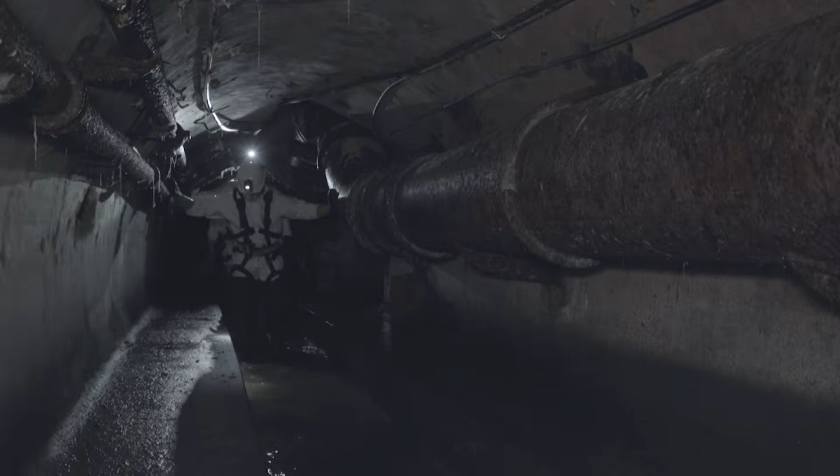This underground labyrinth spreads over 2,600 kilometers, the distance between Paris and Moscow. Hidden and mysterious, and completely unknown to most Parisians.

It's a city beneath the city. Actually, underneath each street in Paris, there's a sewer that's accessible. It feels like entering the bowels of the earth.

Like the city above, the pipes below are always on the move. Every turn of a tap, every flush of a toilet, every minute of every day, Parisians depend on the waste they take away and the fresh water they provide. How does it all work so seamlessly?

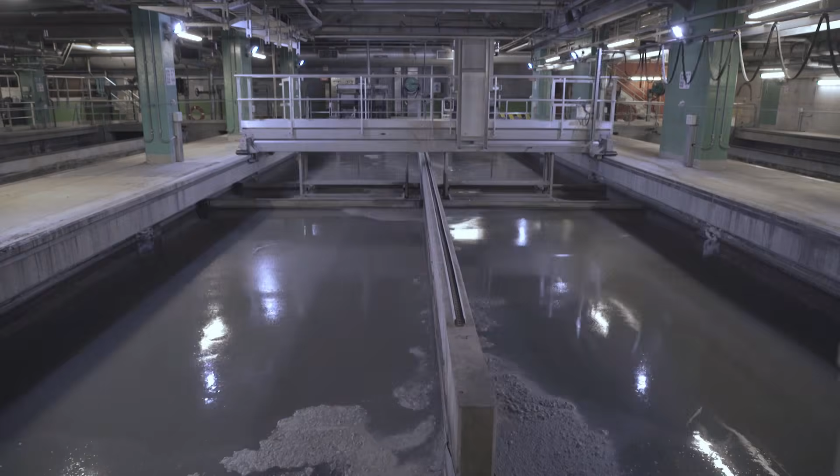Now, thanks to unprecedented access and computer-generated imagery, you're about to discover the secrets of the Paris sewers, where close to 6.5 million cubic meters of wastewater travel daily, equal to 70 Olympic-sized pools per hour.

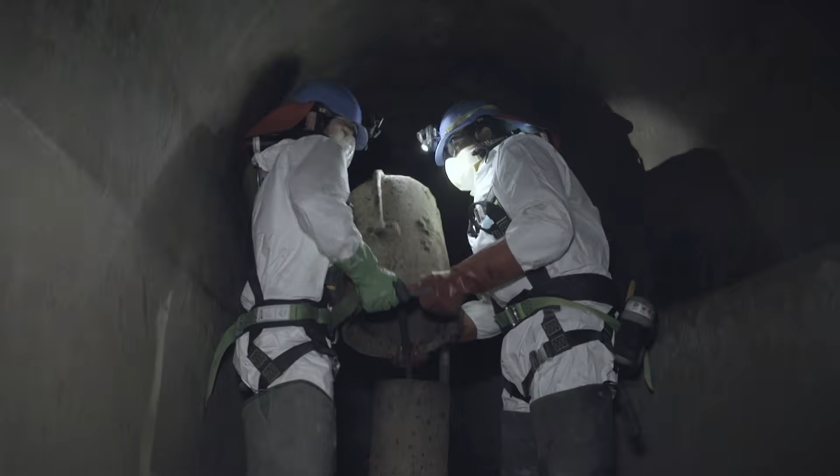This massive infrastructure demands extraordinary equipment. From high-power flushing systems and huge reservoirs to century-old boats designed to clear sand.

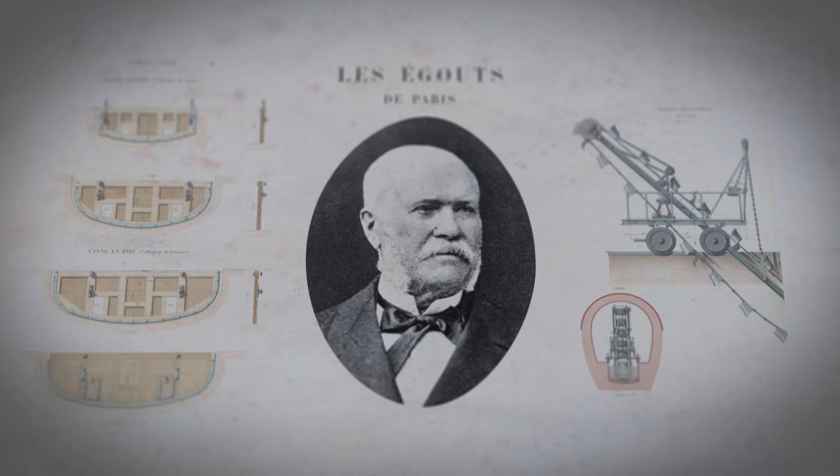The sewers are an undeniable part of the technical and urban legacy of Paris. The know-how and these extremely advanced constructions and machines have withstood the test of time.

Since its creation in the 19th century, the modernistic sewers have transformed to keep pace with the vital city above. Witness the elaborate techniques designed to deal with flooding, heavy rainfall, and provide high-speed decontamination.

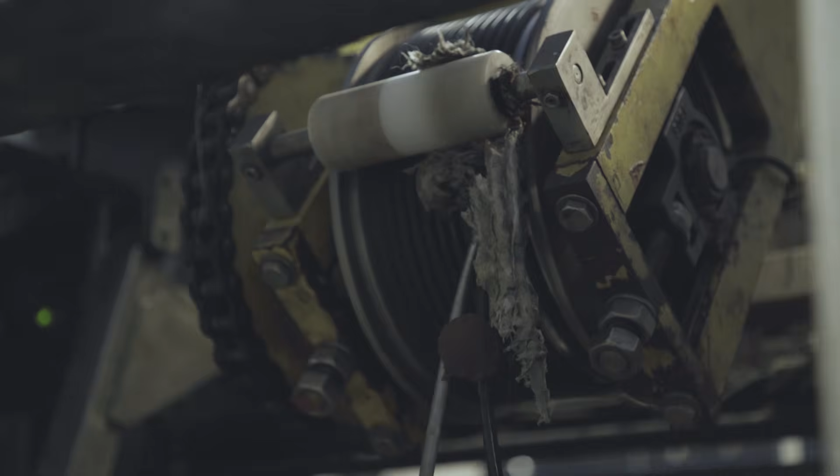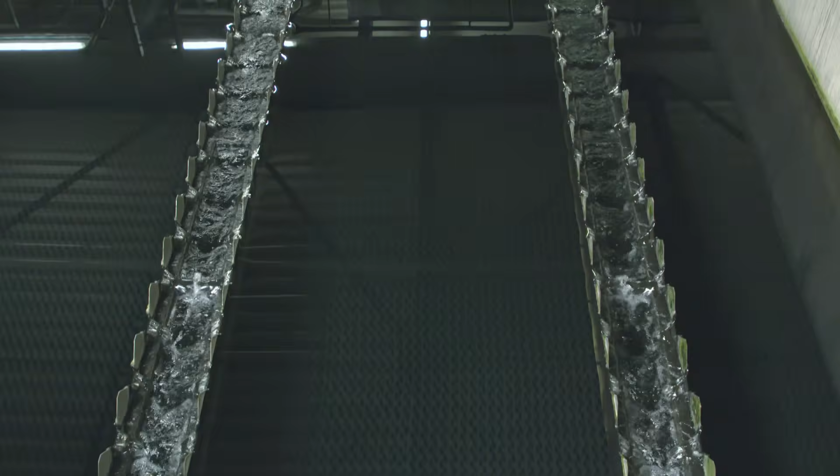Nowadays, thanks to accelerated techniques used inside the plant, we're able to treat wastewater in just a few hours. From the collection of rainwater and wastewater to the distribution of drinking water, your sewer tour will take you on a fascinating behind-the-scenes adventure in history and technology. Deep inside the bowels of Paris, without getting your feet wet.

Every day in Paris, more than 2 million residents flush their toilet, clean their dishes and clothes, and take a shower. All this domestic water ends up in the sewers. This amounts to over 6.5 billion liters of wastewater that must be evacuated each day. Every hour, the equivalent of 70 Olympic-sized pools flows inside this invisible yet gigantic infrastructure.

In fact, the sewers are a network of tunnels mirroring the layout of the streets and boulevards above the ground. In total, 2,600 kilometers of galleries meander underneath the city. If they were put end to end, the sewers would cover the distance between Paris and Moscow.

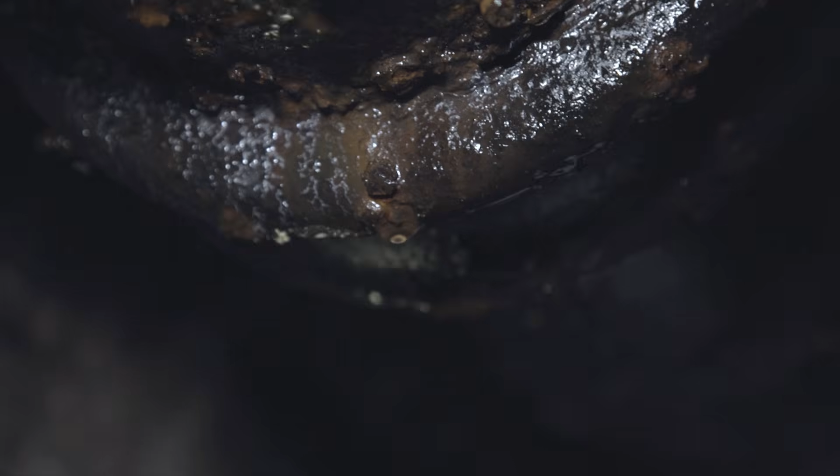This extraordinary infrastructure serves several purposes. On top of collecting wastewater, these tunnels gather rainwater and prevent the flooding of Parisian streets when heavy storms occur. This network also plays a crucial role in providing drinking water to local residents. The underground galleries host a 2,000-kilometer network of pipes distributing drinking water to every Paris household.

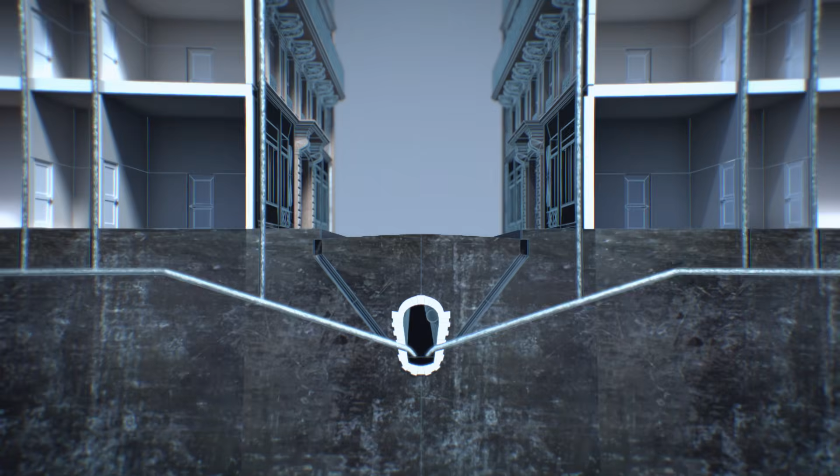Once used, this water returns in the sewer system located only 3 meters underground. Each building has its own evacuation outlet connected to a primary sewer that's about 1.3 meter wide. This first link of the sewer chain then reaches a sub-collector. The latter flows in a main collector between 4 to 6 meters in diameter, located under the big Paris boulevards.

This system can be compared to what you have in nature, such as a source, a small brook flowing into a river until it reaches the sea. It uses the exact same process as the elementary sewer collects wastewater from a single outlet before flowing into a collector and finally reaching the sea, which is represented by the water treatment plant.

The mission of the sewer system is to evacuate the wastewater of over 2 million Parisians, 24 hours a day, 7 days a week. In order to maintain this hidden network, city workers go inside the sewers on a daily basis.

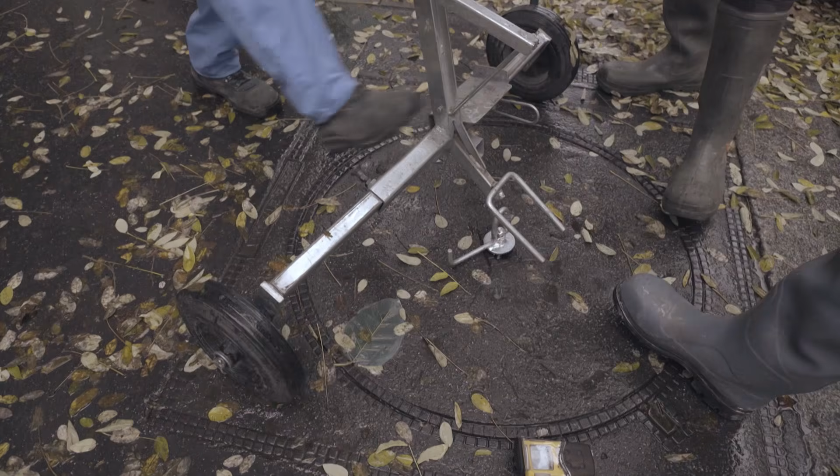Sewer workers access the tunnels through one of the 20,000 manholes scattered across the sidewalks of the capital. Each lid weighs over 80 kilos. Under the pavement, workers find themselves in a confined space ruled by darkness and humidity. This hidden and mysterious part of Paris is completely unknown to most of its residents.

At first glance, the sewer network looks like a maze of alleys and narrow pathways. But in essence, this huge infrastructure is just a mirror of the city streets. Each street, avenue, and boulevard have their counterpart sewer tunnel. This 2,600-kilometer network provides every Paris building with a direct link to this intricate universe.

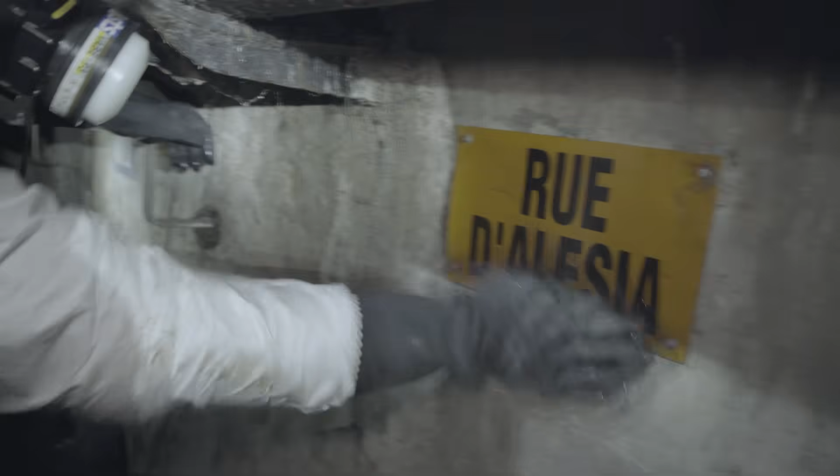Right now, we're under Rue d'Alésia. As you can see, sewer workers install signs to serve as bearings. Every building found above ground has its equivalent inside the sewer system. Here, we're under number 61 and 63. These are the two building outlets. Someone probably flushed their toilet or used water from this section of the building, which is now being collected.

Paris has a total of 100,000 such connections, linking every building to the sewer system. Wastewater from each building is gathered in a single evacuation pipe before being discharged into the sewers.

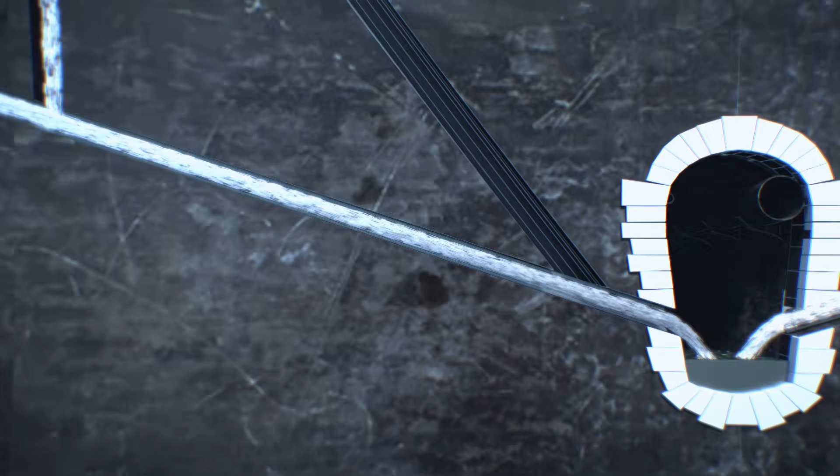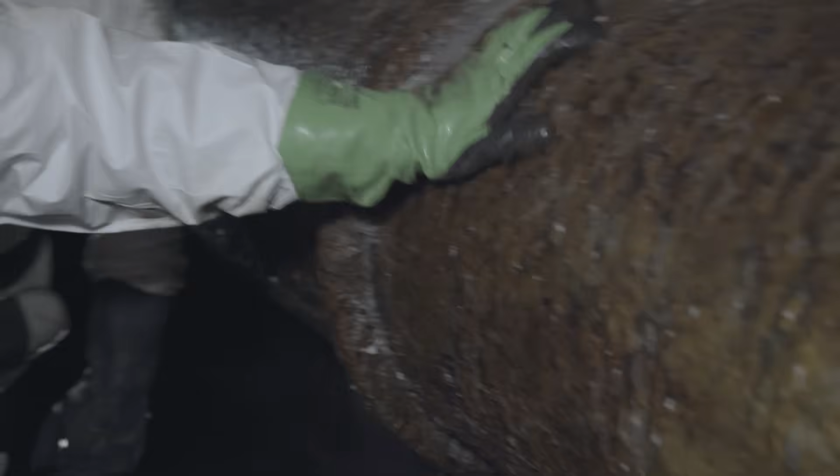In Paris, some 300 sewer workers are responsible for the safe flow of wastewater. Every day, they walk inside the bowels of the capital to maintain this gigantic network. These galleries are part of the historical heritage of Paris, designed over 150 years ago.

In the beginning of the 19th century, wastewater drainage was fairly rudimentary. Whenever heavy rains fell, black water would flood the streets, releasing a foul smell. Paris was at the mercy of the Seine River, so in times of floods, the river would commonly rise through people's cellars and the sewers, causing water to pour onto the streets, carrying garbage, filth, and all the disgusting things traditionally found in urban settings.

In the early 1800s, Paris only had a few dozen kilometers of sewers at its disposal. There were hardly any sewers, and moreover, they were poorly designed and maintained. As a consequence, the city was, according to its residents, unpleasant for both the eyes and the nose.

The poor drainage of wastewater caused several cholera epidemics, killing thousands of Parisians. This dire situation needed to be addressed.

The sewer revolution started with the arrival of Napoleon III and Prefect Haussmann. The city underwent an unprecedented transformation, both on the surface and under it.

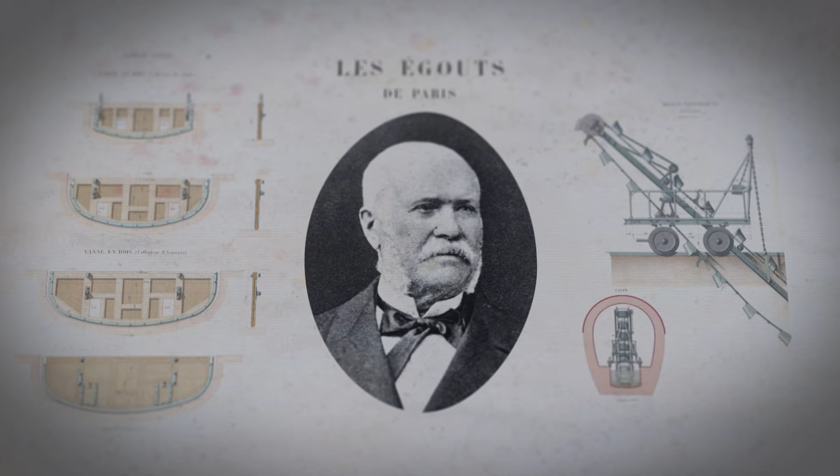To clean Paris, Prefect Haussmann entrusted visionary civil engineer Eugène Belgrand with this ambitious mission. Belgrand's goal was to drain black water through a gigantic underground sewer system.

Belgrand's idea was to develop an underground city planning far more advanced than before. He wanted to dig underground galleries able to collect a large amount of water, and in doing so, to develop a city on two levels. The scale of his project was quite utopic.

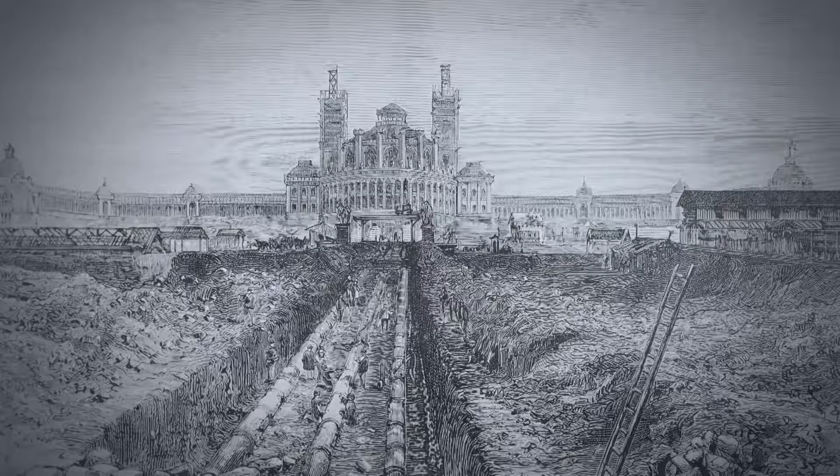To see their mission through, Haussmann and Belgrand undertook colossal work. Every street of Paris was successively ripped open and tunnels were dug. The work stretched over several decades and forever changed the face of the capital.

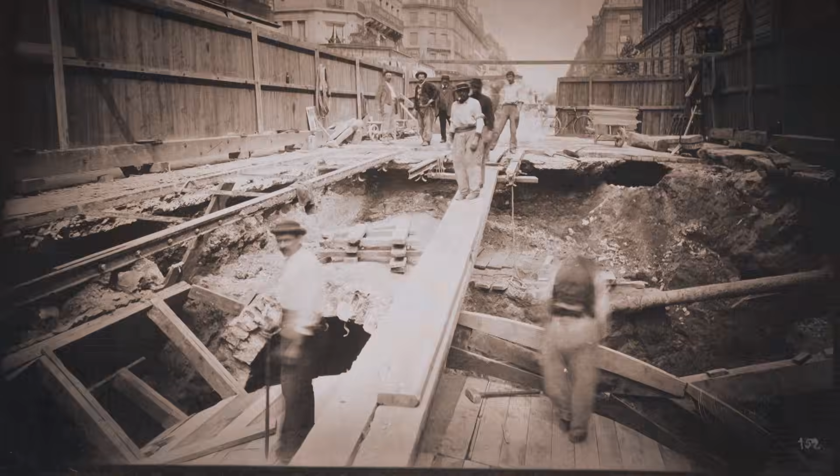By designing this huge underground infrastructure, Eugène Belgrand revolutionized the Paris sewers. In order to drain the capital's sewage, he imagined a gigantic network collecting both wastewater from every household as well as rainwater.

Under the action of gravity, these waters would flow towards the northwest of Paris, thanks to the city's natural hills. The system works automatically, relying on the principle of gravity, without any mechanical action. The use of gravity, therefore, makes pumping unnecessary, which is a very expensive and tricky system to maintain.

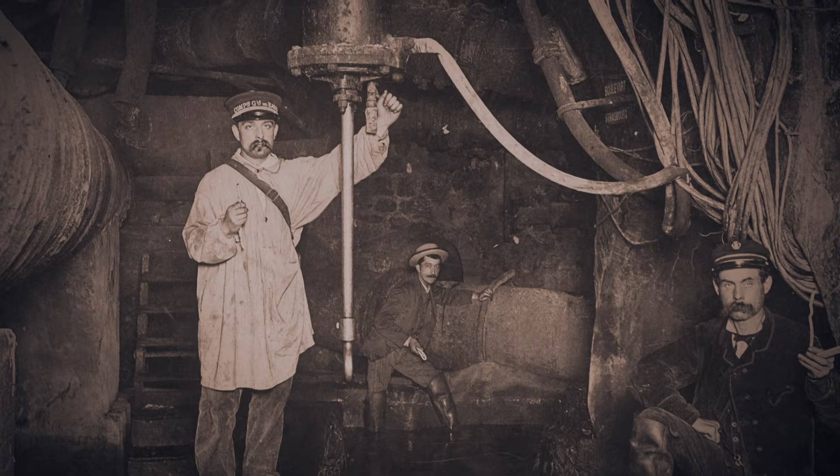Another feature that was unique in the world is that all the galleries were accessible, allowing sewer workers to walk freely along them. Belgrand was a visionary. He established his work's dimensions based on his prediction for Paris's growth and influence on the rest of the world. That's why he designed large, accessible sewers, which facilitated the maintenance work.

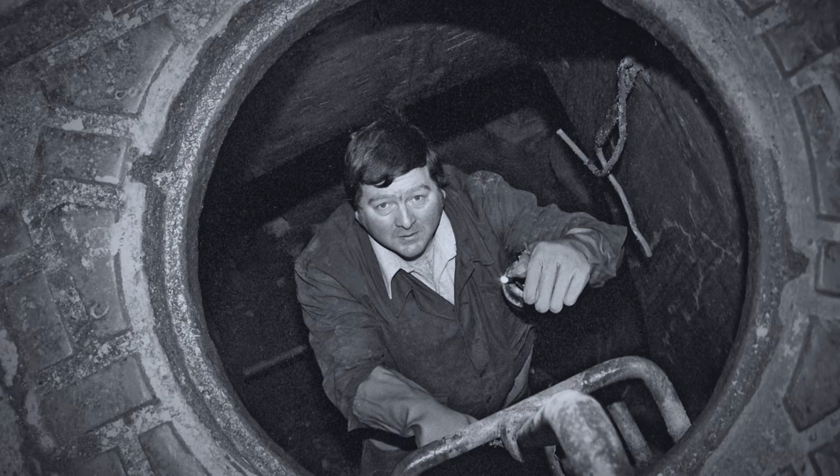A blocked pipe requires a lot of disruptive work above the ground. But when the sewers are accessible, we can go inside, take action, and find the source of the problem.

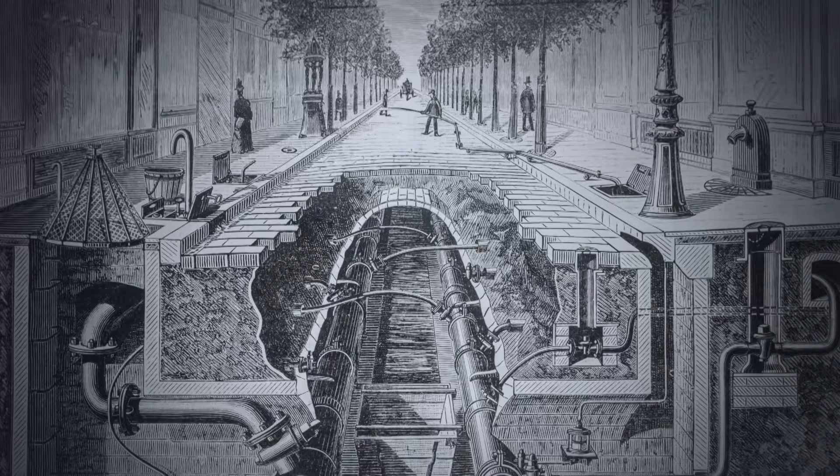In just a few decades, Belgrand and his successors accomplished colossal work. They built hundreds of kilometers of sewers, allowing the discrete drainage of rain and wastewater.

But that's not all. In order to maintain and prevent waste matter accumulation inside this gigantic network, Belgrand had an original idea. He imagined a unique, spectacular system: cars and boats designed to travel inside the galleries and scrape the bottom of the sewers.

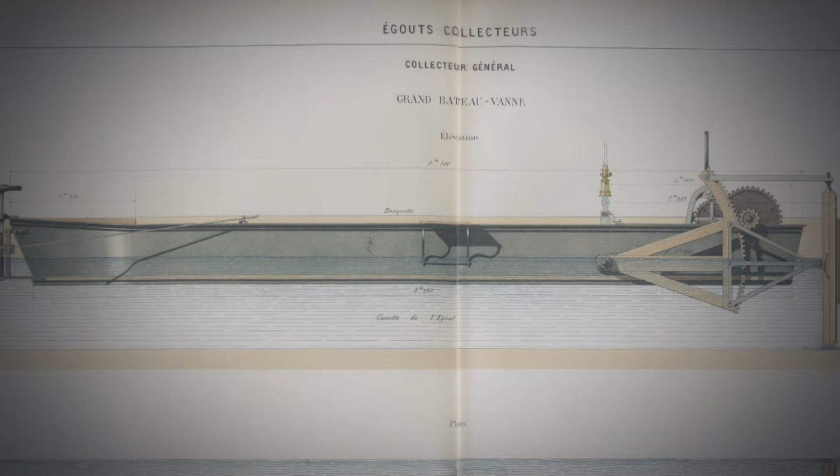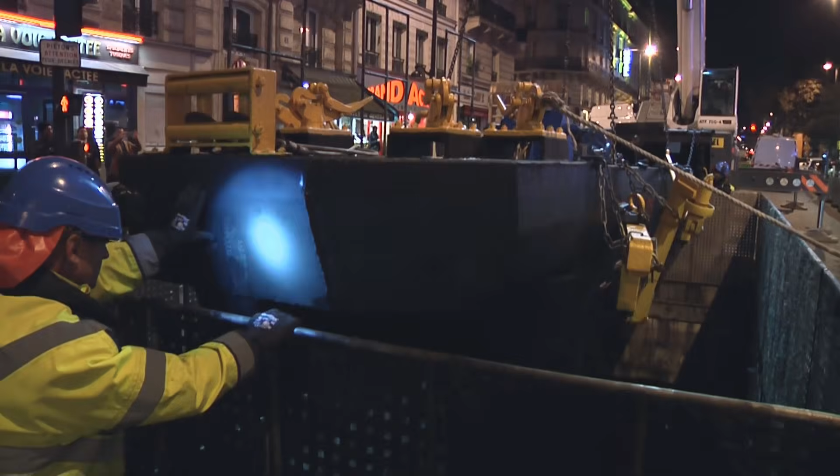To this day, sewer workers use these huge vehicles to go down the city's main collectors. These boats weigh almost 7 tons and measure 10 meters in length and 2 meters in width. This delicate operation is usually done at night to avoid disrupting city traffic. It takes 6 hours to lower a vehicle this size. Once inside the sewers, the scrubbing operation can begin.

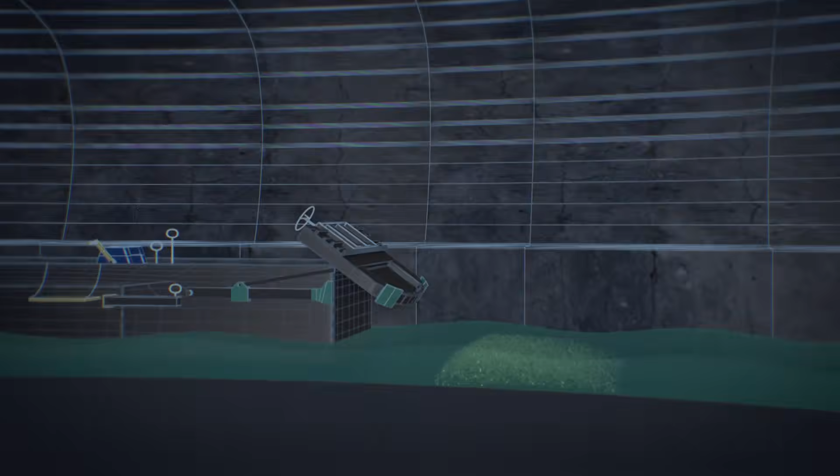When the boat comes to a heap of waste matter, it's blocked. Sewer workers then lower the gate. Moored with chains, the boat is lifted under the effect of rising water coming from the back.

When the level of water is sufficient, the gate is swiftly opened. The flowing water removes the deposits and pushes them forward inside the tunnels. This is how the boat makes its way inside the collector, stopping each time a heap appears or when it's blocked by any unusual object.

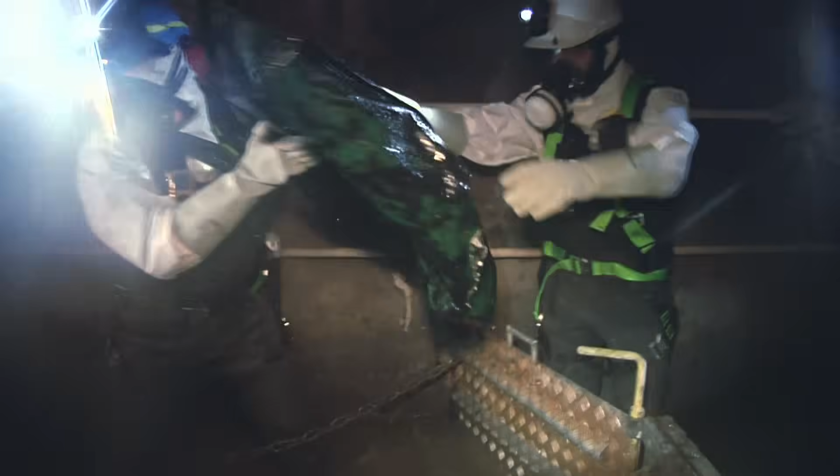Inside the collectors, sometimes we find wheelbarrows left behind by construction workers, cinder blocks, car tires, or tree grates like those you find around the trees in Paris. I don't know how they end up in the sewers, but we find them quite often.

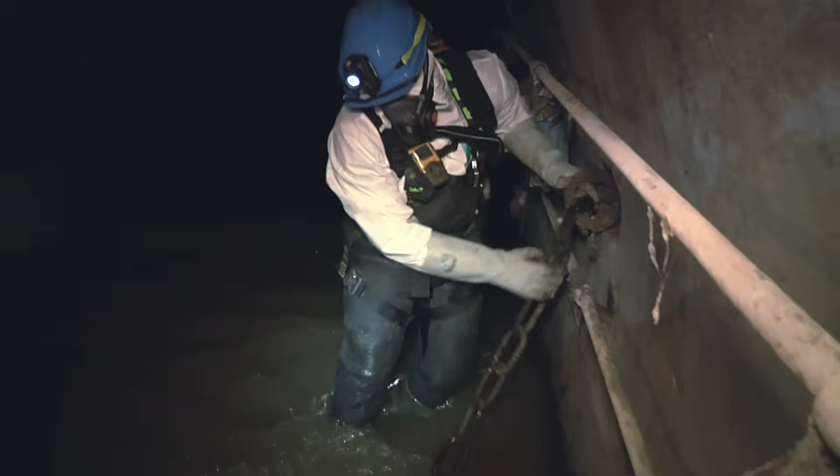In use since the 1920s, these unique gate boats are part of the historical legacy of the Paris sewers. We've tried many different things inside the biggest collectors, where the current is strong, and so far, nothing's worked better than the original gate boats.

Several months a year, sewer workers navigate a dozen gate boats inside the network of main collectors. This operation is very delicate. It requires the participation of 7 workers who must remain alert at all times in a noisy environment.

The workers take turns during the entire operation. For example, the chains in the back of the boat weigh 80 kilos, so it's very demanding physically. It may not seem like it, but operating the gate is super hard.

Gate boat crews are actually navigating a 5-ton vehicle under the thrust of water. If they slip up and the boat starts going, it can't be stopped. The job requires a high skill level.

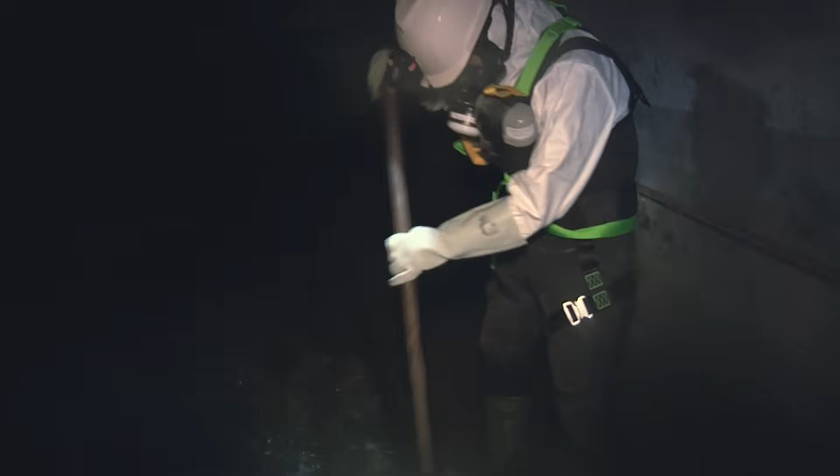These huge gate boats have been navigating inside the bowels of the capital for over a century. As it moves forward at a speed of 30 meters a day, the gate boat pushes the waste matter towards a sand trap.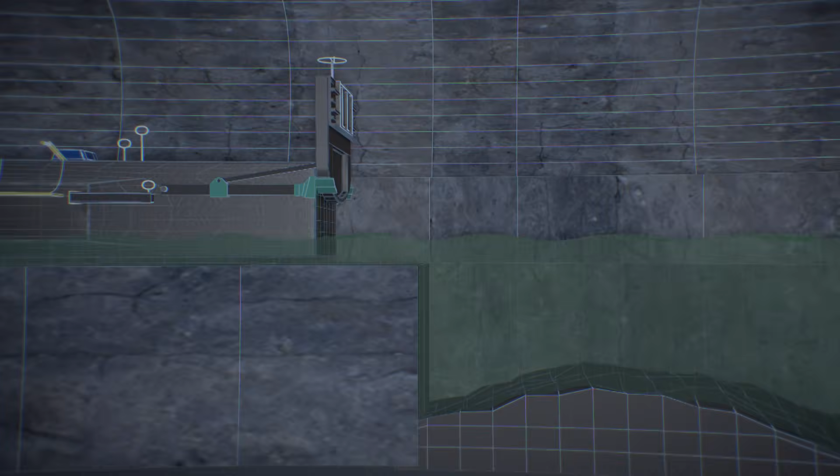About 100 such reservoirs can be found along the main collectors under the boulevards of Paris. On a regular basis, these huge sand traps are dried, emptied, and all the sand is sent to the waste process plant. The main goal is to maintain a quality network that works hydraulically. Every year, gate boats clear up close to 6,000 cubic meters of sand, which could almost fill 2 Olympic-sized pools.

Thanks to the visionary genius of its creator, its great dimensions and regular maintenance, the sewer system has successfully lasted over a century. The men working in the sewers today carry out the same operations their colleagues did 100 years ago.

However, their protective gear has been improved, as the sewer environment can be dangerous.

Inside these dark, confined sewers, the main danger is invisible. In some places, solid substances accumulate and decompose, thus creating potentially lethal gases. One of the most dangerous is hydrogen sulfide, which stems from the decomposition of organic matter. But there's also carbon monoxide and methane, a highly flammable gas.

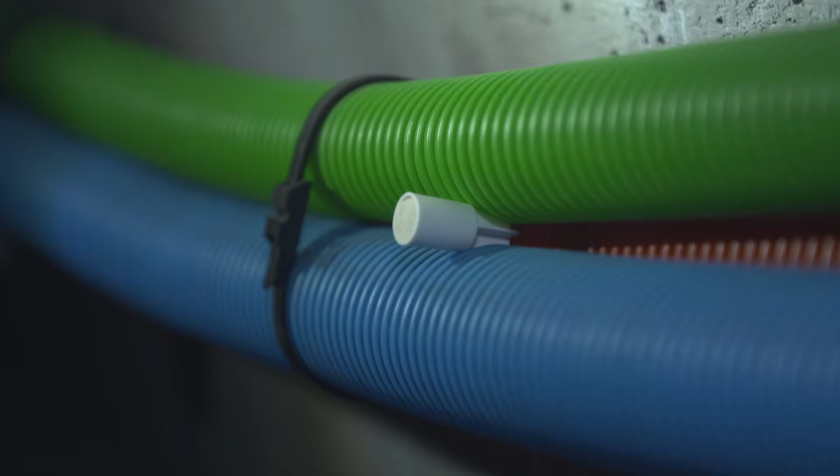Whenever the presence of gas is detected, developing accurate reflexes is vital. Sewer workers must precisely know how to use their protection gear. To that end, they go through rigorous simulation drills on a regular basis.

A control box sets off an alarm after detecting the presence of abnormal gas. In order to shield themselves from this potentially deadly gas, workers must put on their masks as quickly as possible and protect their respiratory systems.

They're equipped with self-rescue masks that provide them with 30 minutes of air supply, which is more than enough time to exit the sewer.

These emergency masks come with a small compartment containing a supply of compressed oxygen. As soon as the mask is in place, the oxygen is released, allowing the user to safely breathe through a self-contained device without any outside air supply.

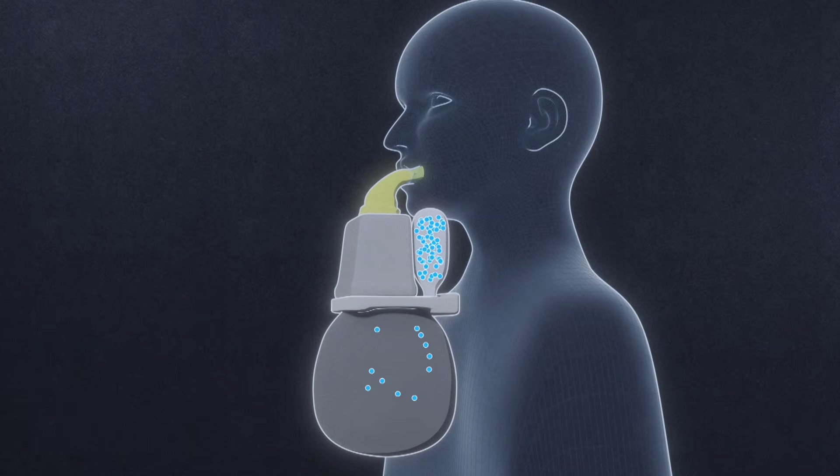This great innovation ensures the survival of workers when confronted with lethal gases.

Between suspended matter, gases, bacteria, and fungi, the dangers are many. Our biggest enemy inside the sewers are gases and bacteriological hazards. We're working inside a huge pipe filled with feces, filth, and many other horrible things. Breathing it in or being in contact with it involves serious risk. It's an extremely difficult job.

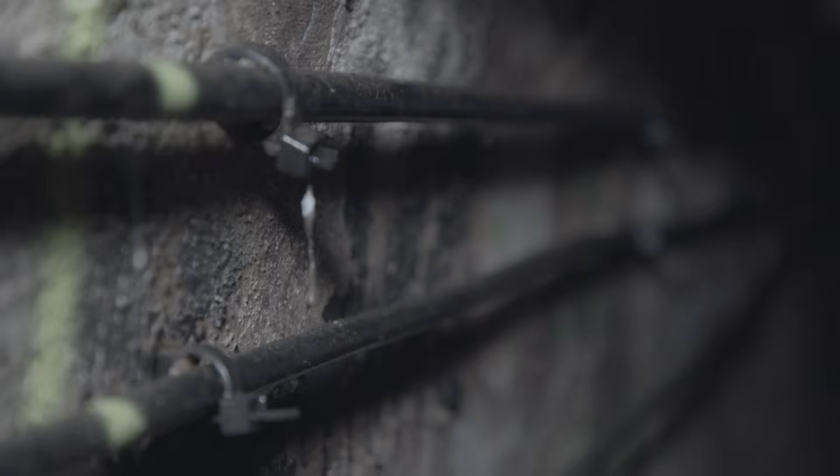These days, sewer workers are not the only ones working inside the bowels of the capital. Other technicians also go down these tunnels. The sewer system doesn't only drain wastewater, it also serves as a technical gallery, hosting the internet wiring and streetlight power cables. What's even more surprising is that it hosts the entire city's drinking water supply line.

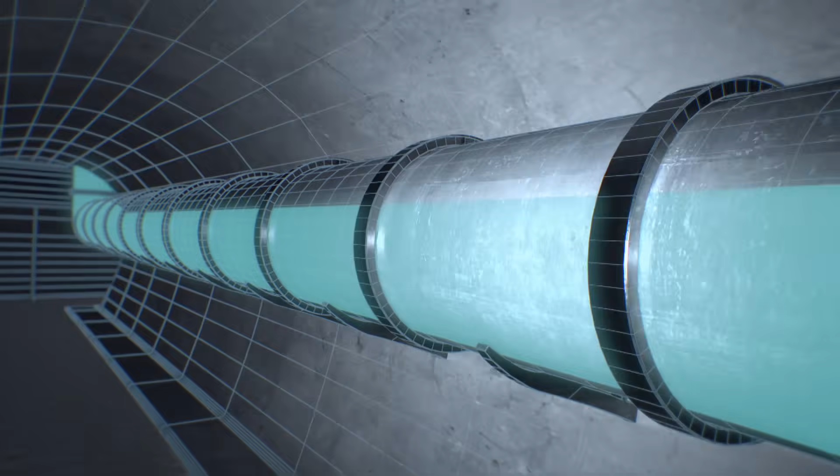These drinking water lines are installed on the roof of the underground galleries. In total, a 2,000-kilometer piping network runs across the sewers in order to supply each and every building. This parallel network was designed and conceived at the same time as the creation of the modern sewer system 150 years ago.

Up until the end of the 18th century, certain Parisians still got their water directly from the Seine River. But back then, the water was contaminated. Since the Seine was used as a main drainage, its water was extremely polluted, which is why Mercier, debating on the subject not long before the French Revolution, had this powerful quote: 'Parisians empty their chamber pot in their carafe.'

While the poor got their water directly from the Seine River, the rich hired water carriers who collected water from public fountains supplied by better quality underground sources. But there wasn't enough water available to meet the needs of all Parisians.

In the middle of the 19th century, Prefect Haussmann had the idea of drawing cleaner water from outside the capital. Eugène Belgrand, who was responsible for creating the sewer system, was also tasked with bringing drinking water to the heart of Paris. To achieve this, he imagined an entirely connected, complex network.

The engineers started by locating several water sources within a 150-kilometer radius around the city. But drawing water was not all—it needed to be transported all the way to Paris. Inspired by the Romans, Belgrand had a gigantic aqueduct network built in order to carry water over huge distances.

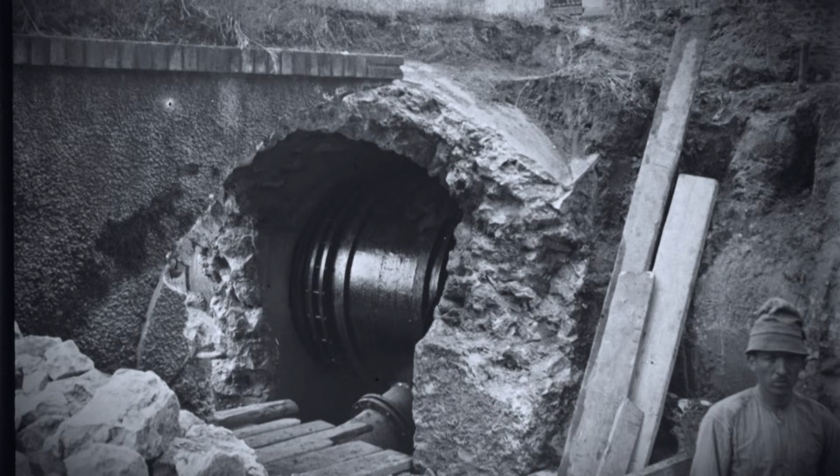In these monumental structures, the water simply follows the natural inclination of the land until it reaches the bottom of the Paris area. It flows from the source under the action of gravity, all the way to the edges of the capital. Then, the water runs along the pipes inside the sewer network.

Belgrand used the principle of gravity. In other words, the water flowed towards Paris because it came from higher ground. He used the topography of the Parisian area, which was not only relevant, but also contributed to the system's resilience, as evidenced by the fact that it still provides half of the water consumed in Paris.

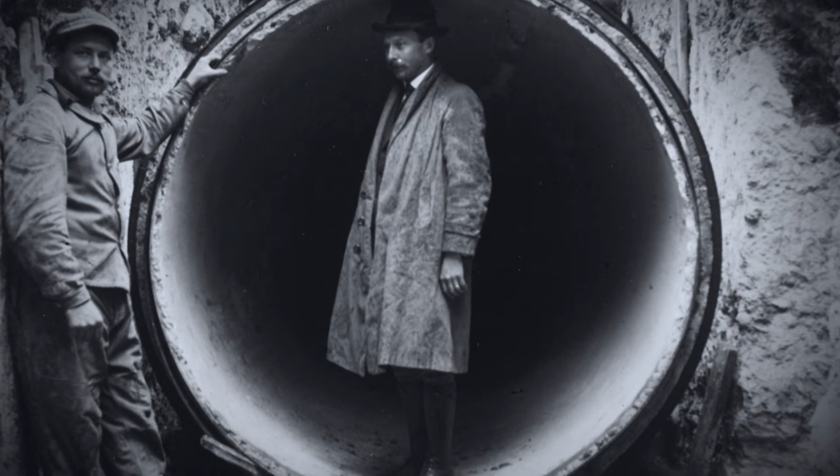This colossal worksite, built in parallel with the construction of the Paris sewers, lasted about 40 years. The work was completed well after Belgrand's death in the early 20th century.

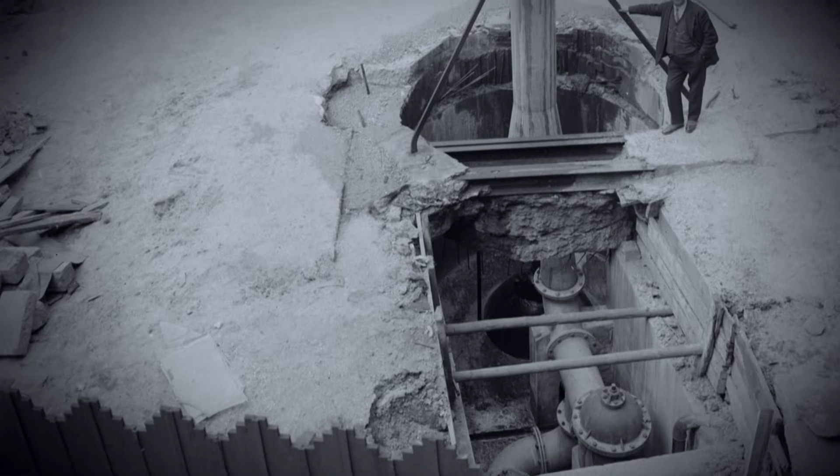The work accomplished by Belgrand and his successors is remarkable. In total, 470 kilometers of aqueducts were built. To this day, these structures bring water drawn from about 100 intake points all around Paris.

Finally, the drinking water is distributed to Parisian households, thanks to some 2,000 kilometers of pipes installed inside the sewer network. At the time it was designed, at the end of the 19th century, this unique network, used both to drain wastewater and to distribute drinking water, was a genuine innovation.

The most remarkable thing about Belgrand's system is its longevity. To this day, Eau de Paris uses the network that was designed and built by Eugène Belgrand and his successors. Today still, the sewer network plays a key role in the distribution of drinking water across the capital.

This joint system offers a tremendous advantage, as the pipes are accessible from inside the tunnels. In the event of leaks, or simply to maintain the pipe network, the city doesn't have to rip the streets open or hinder traffic.

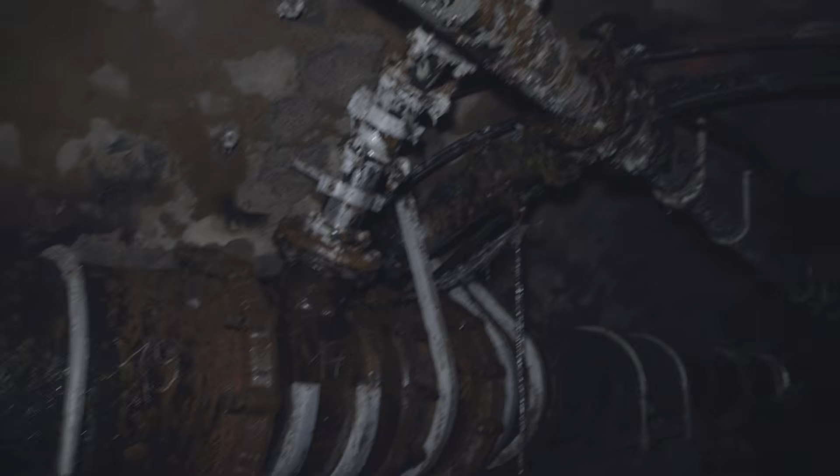City workers have direct access to the sewers. The drinking water pipe network hangs from the ceiling. Water travels inside 2,000 kilometers of pipes inside the sewers, distributing water to every building and fire hydrant. Every so often, the pipes start to leak and need replacement.

Despite the proximity between the drinking water and wastewater networks, there is zero risk of contamination. The pipe is under pressure along its entire length. There are no weak spots. We're absolutely positive that nothing can enter the pipe—no foreign body can get inside.

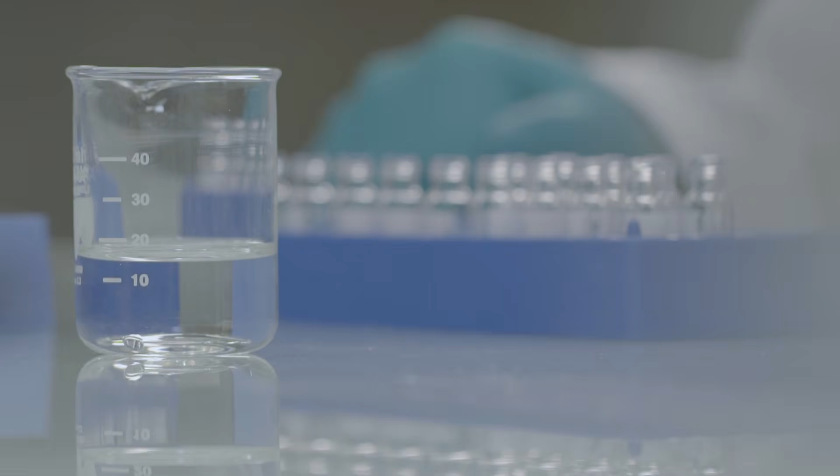Water is the most closely monitored consumer good in all of France. In Paris alone, it undergoes over 1 million tests every year. These are done through all the stages of distribution, well before the water reaches the sewers. Every measure is taken to ensure water of the highest quality.

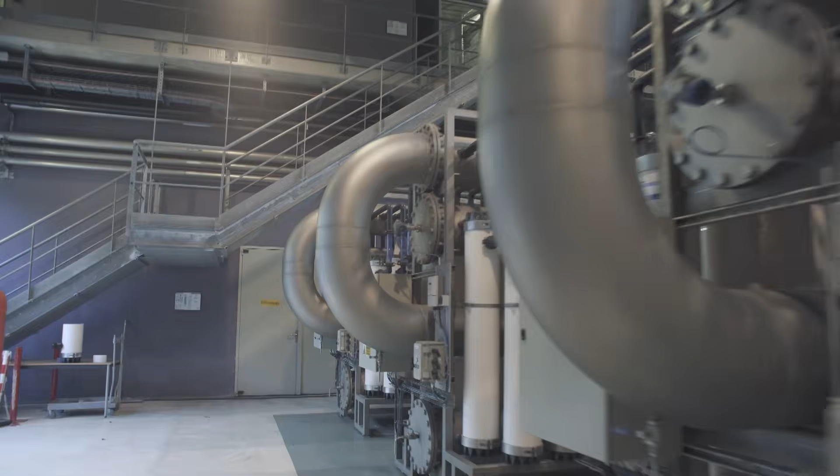Before traveling inside the sewer system and reaching Parisian households, the water undergoes a series of treatments. Some are done here, at the water treatment plant of L'Haÿ-les-Roses, just south of Paris. This gigantic facility collects underground water from the Sens region. The state-of-the-art plant produces 110,000 cubic meters of water every day, which amounts to one-fifth of the capital's drinking water needs.

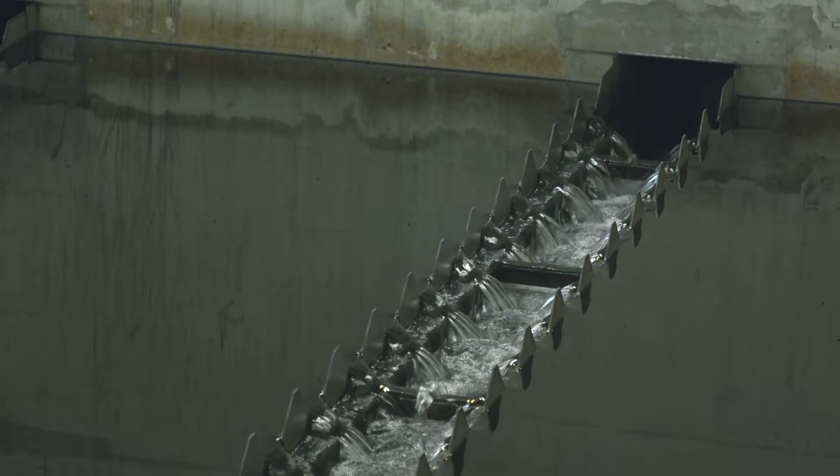When it reaches the plant, the water seems clear. However, it contains several substances invisible to the naked eye and potentially hazardous to our health.

The water is already clear, but it's not clean enough to drink. In fact, it contains materials such as ground minerals, bacteria, and parasites. These elements, together with pesticides, will be eliminated through a thorough treatment process.

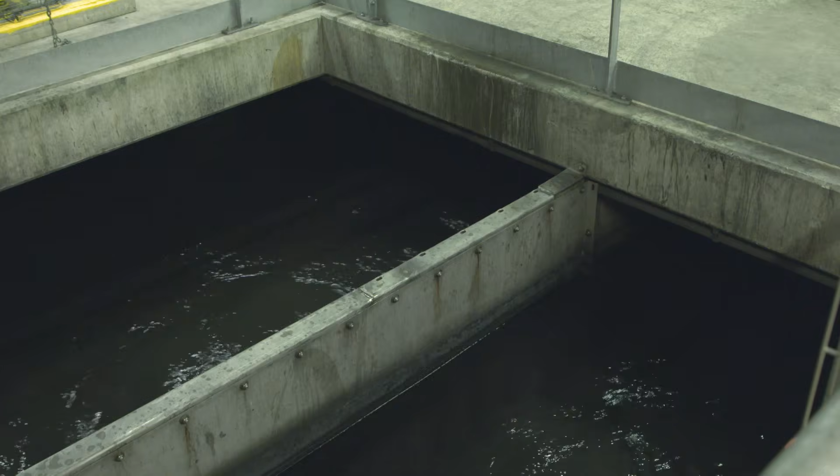The first part of the treatment involves pouring the water inside huge tanks saturated with carbon powder. Active carbon is highly porous and attracts, just like a magnet does, a great number of suspended particles, such as pesticide residues. The water is then relieved of these substances through a settling process before being sucked up and sent to the second stage of purification.

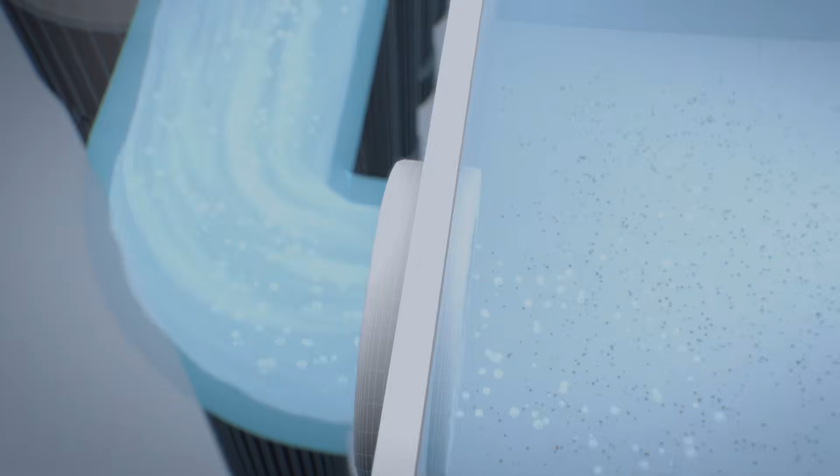When water reaches this gigantic room, it's pushed under high pressure inside one of these white units. This is the ultrafiltration stage. Ultrafiltration is actually a mechanical filtration. In other words, it uses the same principle as a sieve or a coffee filter, but in this case, the mesh is very small, only 0.01 micrometer. This means we catch any particle bigger than 0.01 micrometer.

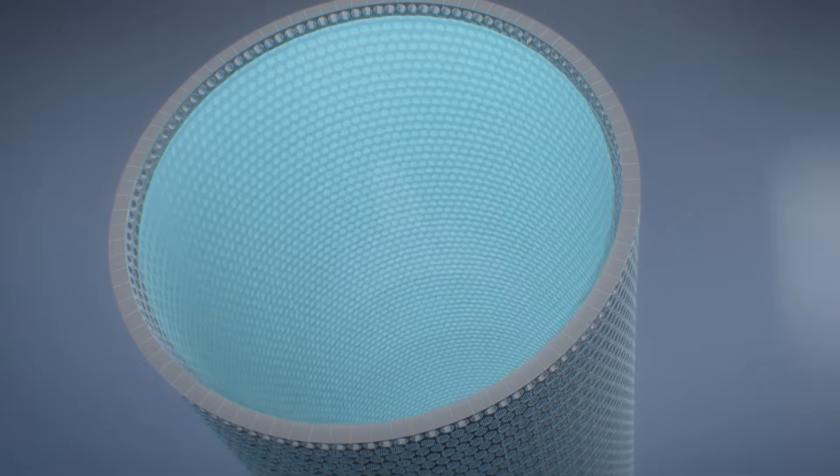Each unit contains about 100 tubes. These tubes are made of punctured membranes. The hole size is 0.01 micrometer, which is 10,000 times smaller than skin pores. That means no bacteria, virus, parasite, or any organism can go through this barrier.

The total surface area of this ultrafiltration plant equals 66,000 square meters, meaning that our process is highly concentrated. If we were to build it with a different technology, the equivalent of this room would require a surface area between 60 to 70 soccer fields, which is substantial.

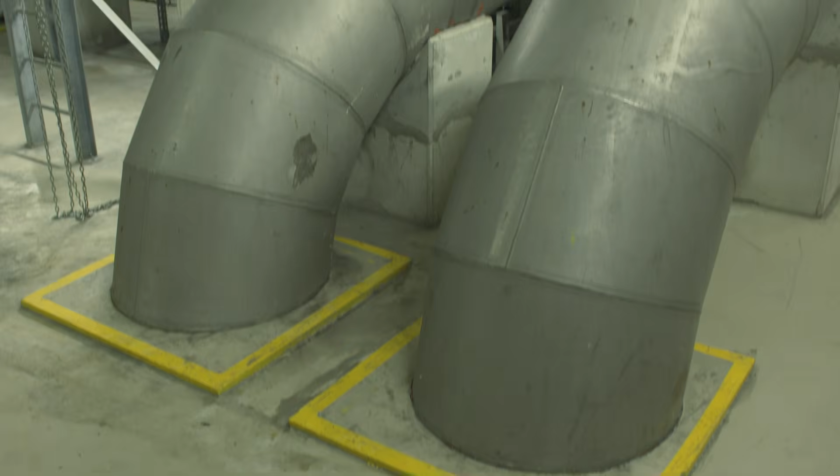After this stage, the water is almost drinkable. It has been freed of all the undesirable substances, but it still contains minerals. During the last step, a small amount of chlorine is added. This will preserve the water quality during the entire time of its storage and transportation. This step is absolutely necessary before the water can travel inside the pipes across the gigantic Paris sewer network.

Nowadays, half of the water consumed by Parisians comes from underground sources treated in purification plants located close to the aqueducts. The other half is drawn from the surface waters of the Marne and Seine rivers, which are also treated in plants surrounding the capital. By multiplying the supply sources, Paris is able to meet the needs of all of its residents.

This creates an extremely strong and resilient system while ensuring its resistance in the event of a crisis. This is all thanks to the 5 different vectors made up of 3 underground sources and 2 surface waters, the Marne and the Seine rivers, allowing us to produce twice the actual daily needs of Parisians.

When it comes out of the treatment plant, the water hasn't reached its destination yet. Before traveling along the sewer network to be distributed inside the homes, it has to be stored in one of the 5 main reservoirs of the city. These are huge covered pools, and the most emblematic is located in the 14th arrondissement.

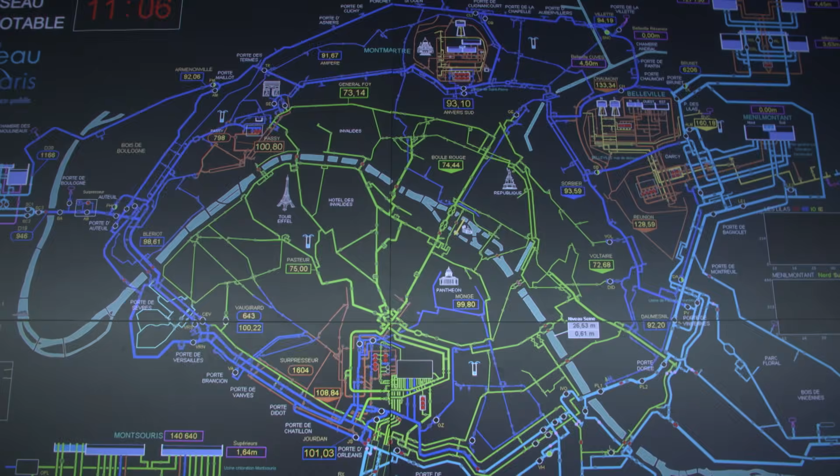In this ultra-secure room, agents remotely coordinate drinking water stocks allocated to the capital. They monitor the entire network in real time, including the 2,000 kilometers of underground pipe network within the sewers of the city.

Inside this control tower, dispatchers take turns 24 hours a day to meet the needs of Parisians. Here, we process 19,000 variables, which amounts to millions of data points each day, and we're able to remotely control most of the facilities.

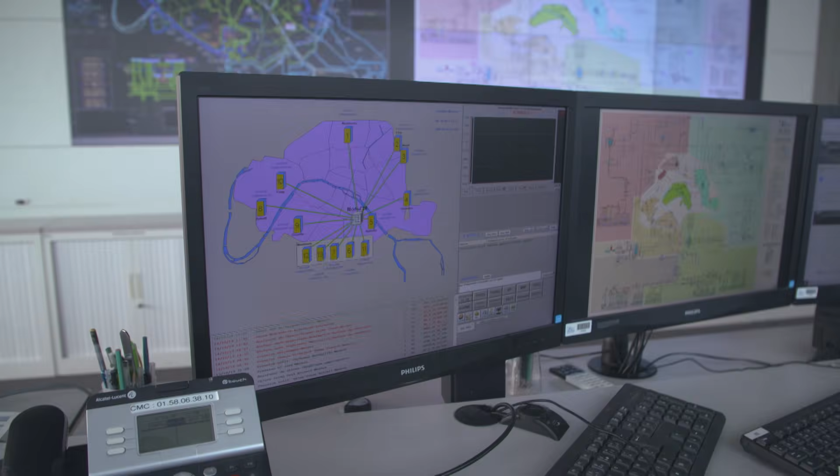On a daily basis, our dispatchers open the gates inside the network to increase pressure, fill reservoirs, and allow more efficient storage. Their only goal is to ensure water distribution to every Parisian at all times, 24 hours a day.

On top of ensuring constant distribution of drinking water, the agents must also guarantee even pressure in every faucet, which is set at a minimum of 2.5 bars.

In the lowest neighborhoods of Paris, this pressure is reached naturally, since the reservoirs are located on higher ground. The water flows directly under the effect of gravity. It's very environmentally friendly, as we don't need any driving force to push the water and guarantee its pressure.

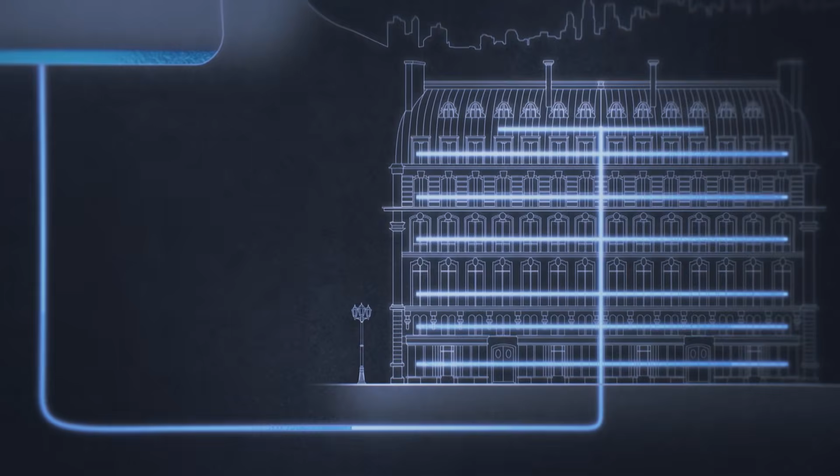In Paris, most reservoirs are situated on high ground at an altitude of about 25 meters. At their outlet, water is released at a pressure of 2.5 bars in the pipes located inside the sewer network. This pressure is sufficient to distribute water to buildings in the lowest neighborhoods of the city, all the way up to the 7th floor.

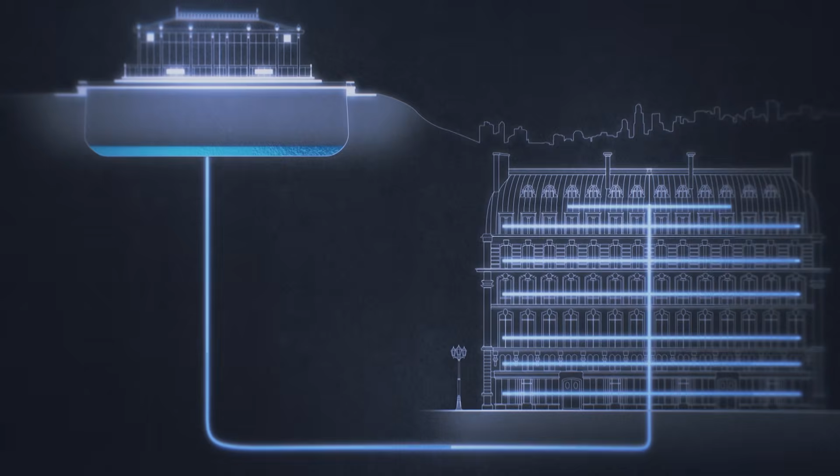Each day, close to 500 million liters of water are dispensed all around Paris.

On top of managing drinking water, the Eau de Paris agency also ensures the distribution of non-drinkable water across the capital. This water is drawn directly from the Seine River and the Canal de l'Ourcq. Once filtrated and rid of its plant residues, this raw water travels through 1,700 kilometers of pipes that are also tucked inside Paris's sewer network.

This ingenious system is once again the brainchild of Eugène Belgrand. The distinctive feature of the sewers is to house a double underground network providing both drinking and non-drinkable water.

This one-of-a-kind network for non-drinkable water is used to water gardens and supply decorative fountains. This non-drinkable water also plays a key role in the maintenance of the streets and sidewalks of the city.

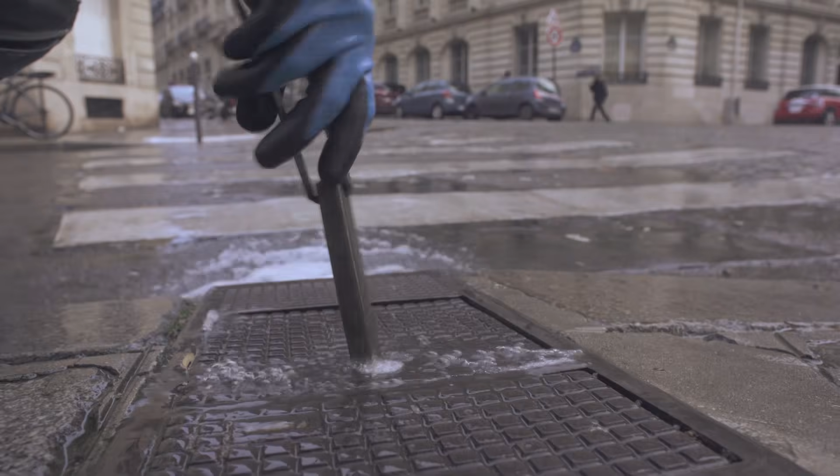Every morning, cleaning crews open water supply gates. Over 17,000 such gates are scattered across Paris. The streaming water clears the gutters, carrying leaves and other trash in its flow. These water gates are also used to fill street cleaning trucks.

The tourists who visit Paris are often surprised to see water flow along the sidewalks. They wonder what it's used for. They sometimes think it's being wasted.

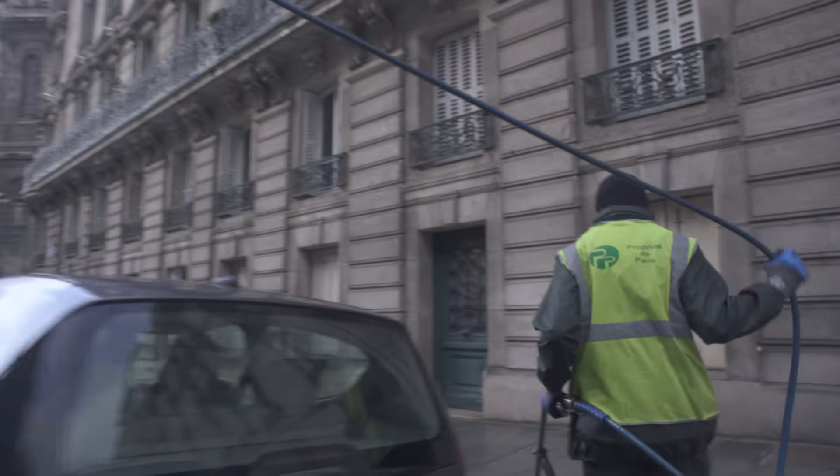In recent years, we've been criticized on Twitter and told it was unacceptable to waste drinking water because it's a rare and valuable resource. But in reality, it's not drinking water. It's drawn directly from the Canal de l'Ourcq or the Seine River. In that sense, it's very environmentally friendly since this water isn't wasted. It ends up in the sewers, where it helps evacuate black water.

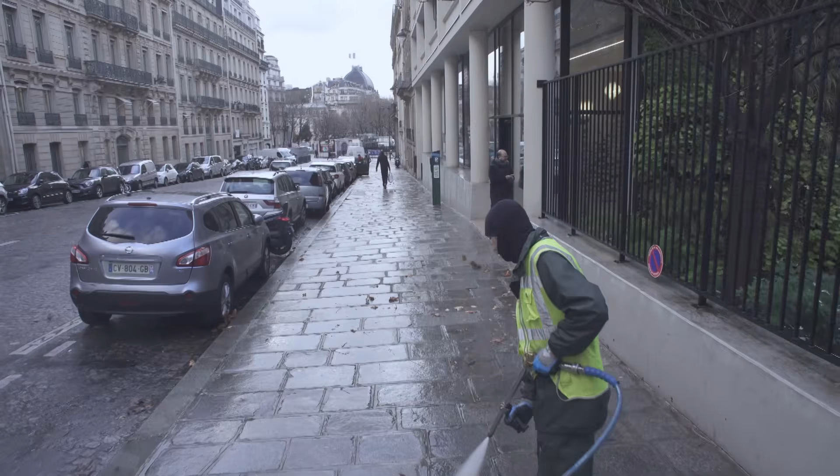The vast majority of the streets of Paris are on a slope. Therefore, the cleaning water flows naturally along the roads before ending up in the closest drain.

This is how rainwater and cleaning water flowing inside the sewers facilitate the evacuation of wastewater. But it's insufficient to maintain the network, which is regularly blocked with sand.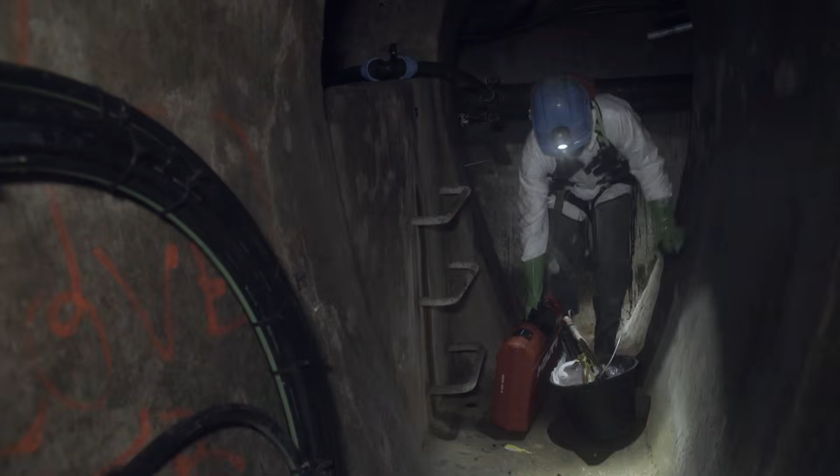On top of the imposing gate boats, another ingenious system was implemented at the end of the 19th century: a flush cistern. Several hundred tanks containing non-drinkable water are scattered across the network and regularly maintained by sewer workers.

1, 2, 3, right here. Let's put it over there.

It's a preventative measure to avoid potential organic matter deposits or rat traps. It creates a flushing action, which also contributes to better ventilation and keeping the tunnel generally clean, while helping the cleaning crews when they need to work on specific problematic sections.

Several times a day, these reservoirs fill up and release an average of 5 cubic meters of water. This fast, pressured water helps clear out the smaller sewers on a daily basis, while contributing to their cleaning. In fact, it's a bit like the one you have at home—basically the extra large version of a toilet flush. Thanks to the water drawn from the Canal de l'Ourcq and the Seine River, the sewers are almost self-cleaned. The non-drinkable water network hence plays a key role in evacuating the wastewater through the 2,600 kilometers of tunnels underneath Paris.

But when heavy rain strikes, water can become a dangerous enemy. When significant storms occur, all the rainwater falls inside the gutters and combines with wastewater to block the sewers. The water level can thus rise dangerously and saturate the network. When it rains hard, rainwater is added to wastewater, and this can cause a flood. The tunnels are pretty large, but rainfall can still be very intense, and in that case, Paris could be flooded.

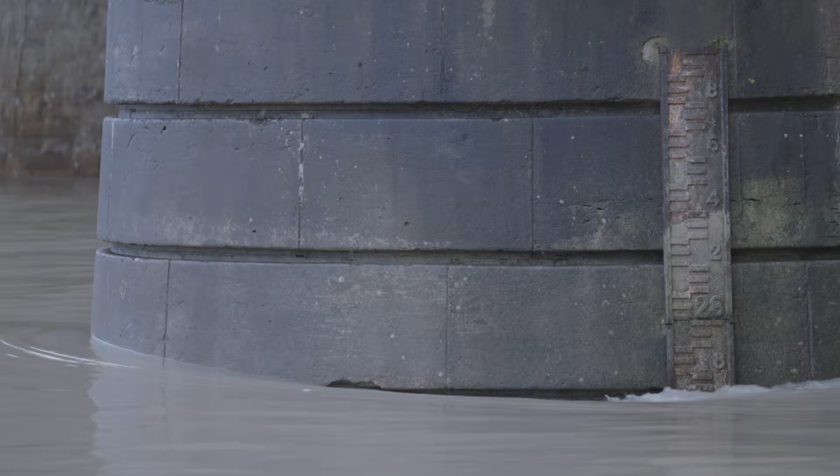In case of saturation, and to prevent the sewers from overflowing, these safety valves are opened to pour the excess wastewater and rainwater into the river. On the other hand, when the Seine River is in spate, these spillways are closed to prevent the river water from pouring inside the sewers.

These spillways are in fact linking devices between the drainage system and the natural environment, which is the Seine. When it rains too much, the spillway evacuates the overflow.

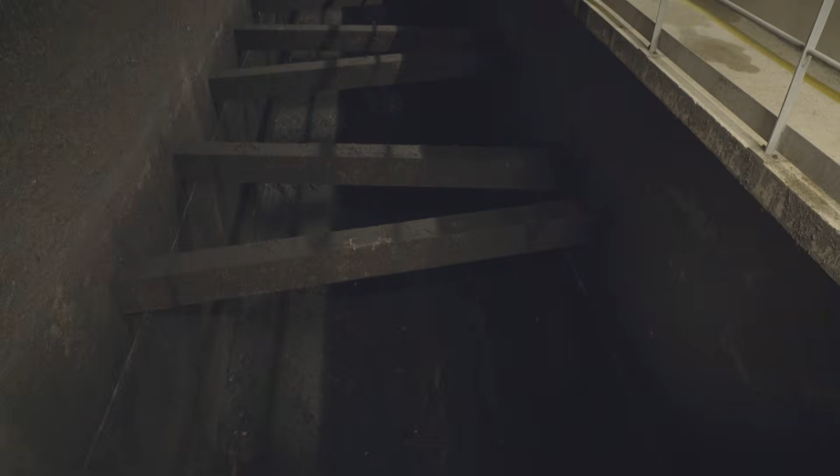Since wastewater is highly polluting, huge underground reservoirs were built in the 1990s to prevent the overflow of black water into the Seine. They're located along the river, like this one under Parc de Bercy in the 12th arrondissement.

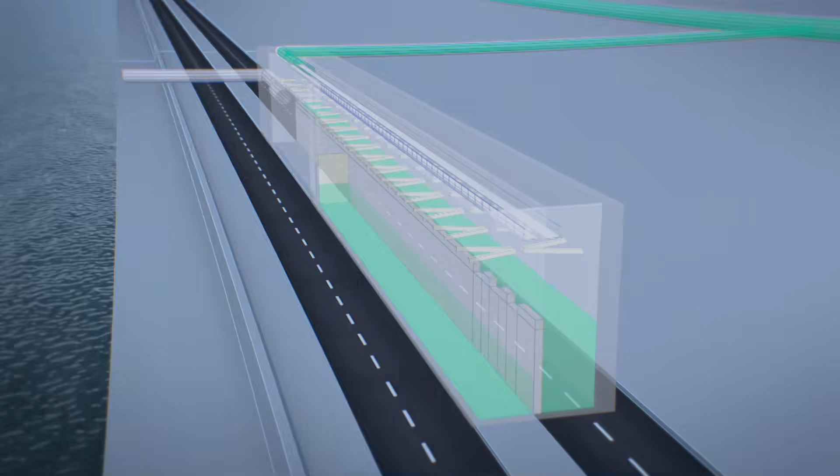This gigantic storage facility comprises 4 compartments measuring 200 meters long and 13 meters wide. In case of heavy rain, the 4 pools can store up to a total of 17,000 cubic meters of water from the sewers, which is the equivalent of over 4 Olympic-sized pools. After the storm, all this water simply returns inside the sewer network to be brought to the purification plant, where it will be treated under the appropriate conditions.

Nowadays, every possible effort is made to protect the quality of the Seine River. Thanks to its many strong structures, Paris can keep over 142,000 cubic meters of wastewater in case of heavy rains, the equivalent of 38 Olympic-sized pools. Over the span of 20 years, this system has proved its worth, lowering the volume of water discharged into the Seine River by 90%.

Today, environment protection is the number one priority. At the end of its journey, after traveling through hundreds of kilometers of tunnels under the capital, the wastewater is transported to the plants located in the northwest of Paris.

The sewer network reaches its destination in huge water treatment plants, such as this one in the city of Colombes. Every year, this gigantic plant treats the wastewater of over 1 million residents. One of a kind in Europe, it has the unique characteristic of being mostly buried—indeed, 2/3 of the facility are hidden underground.

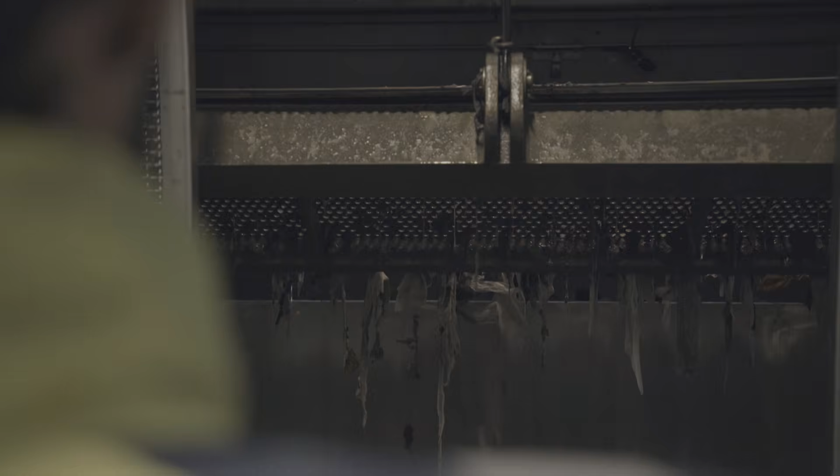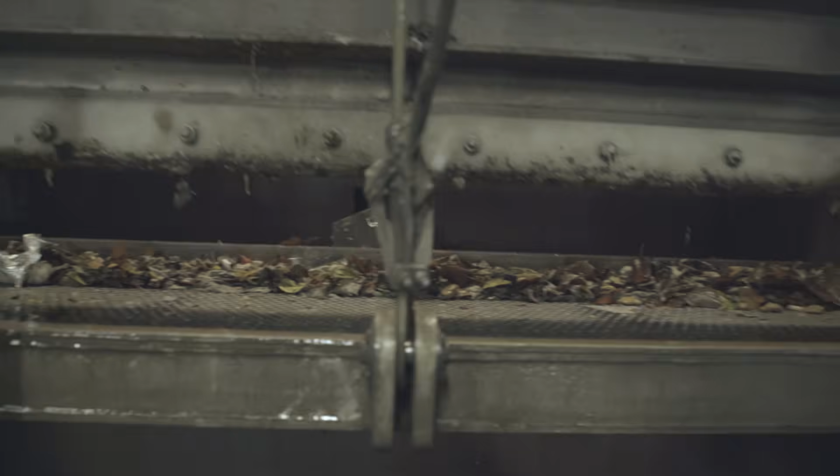Here, sewage water undergoes a real shock treatment. The first step is to eliminate coarse waste such as plant residue, wipes, or pieces of plastic. All this trash goes through huge filters—meshes of various sizes that catch the waste, compress it, wring it out before sending it to a treatment plant.

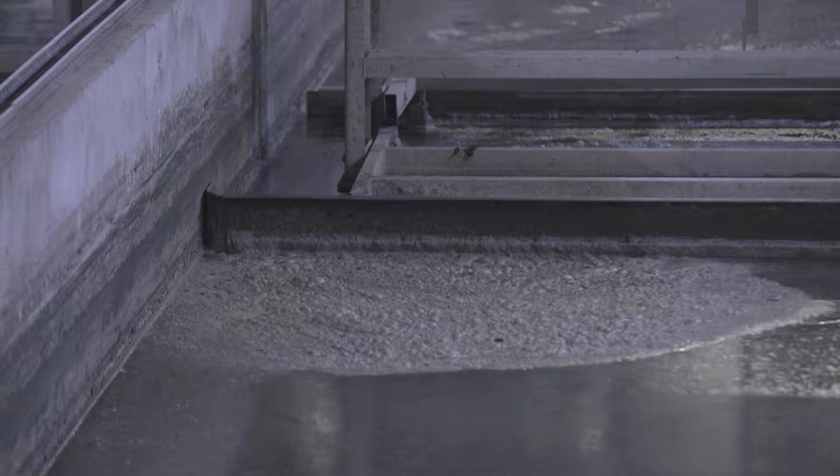After going through the filters, the water continues on to huge settling tanks. In the Parisian region, there are construction sites all year round, which causes granulated materials and mineral deposits. The more general term is sand, which is retrieved in a desander. As we slow down the water flow, these materials settle at the bottom of the desander, where we retrieve them.

These huge compartments serve 2 purposes. They allow workers to fish out the heavy sand sinking to the bottom of the tanks, and simultaneously, grease rises to the surface and is collected with enormous scrapers.

The water is now rid of the more apparent waste, but it still contains numerous invisible substances derived from organic matter, such as carbon, phosphorus, and nitrogen. In order to capture these dissolved elements, water undergoes two types of shock treatments. A first chemical treatment captures the carbon and phosphorus molecules. Then, water is put into contact with millions of bacteria that digest the nitrogen found in urine. This step is called biofiltration. After these chemical and biological treatments, the water is completely purified, and in record time.

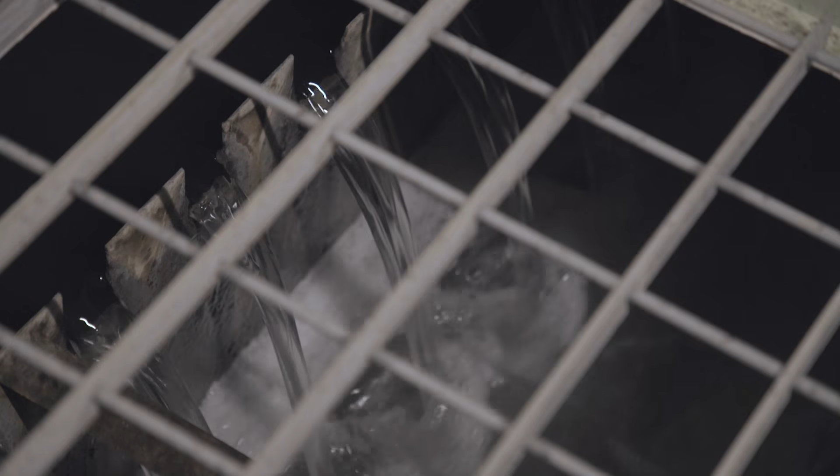Each drop of water is treated in just two hours before being returned to the Seine River. The sewer system and the advanced performance of wastewater treatment both contribute to the improvement of the ecological state of the natural environment of the Seine and Marne rivers.

Today, we notice that fish life is growing more and more as we discover new species every year. Thanks to the improvement of purification techniques, the waters thrown back in the Seine River present no risk to aquatic life. Each year, several billion liters of water are returned to the natural environment.

These days, the entire sewer system, from the wastewater collection to its purification, is studied in order to ensure the protection of the environment and possibly even change it into a reusable resource. What if sewage could become a source of energy?

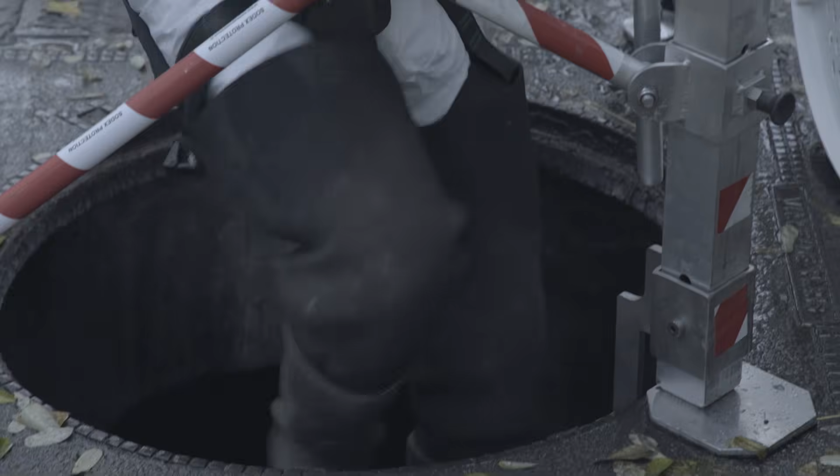For the longest time, sewage was a waste, and it had to be kept underground, which is why the system was designed this way. But today's reflections are a bit more open, and we consider that the sewer system could be used for things other than just evacuating waste, even though it must obviously maintain its primary function.

When it comes to sewer systems, wastewater can indeed be used to heat buildings. By installing a heat exchanger in the sewers, it's possible to heat the nearest building through an adapted heating system.

Retrieving heat from the sewers to heat up buildings is the astounding innovation that's been implemented in the capital since 2016. The water inside the sewers has an average temperature varying between 14 and 20 degrees Celsius, thanks to the hot water drained from bathrooms, but also washing machines and dishwashers all around the city. With a heat exchanger, it's possible to recover this valuable heat from the sewers.

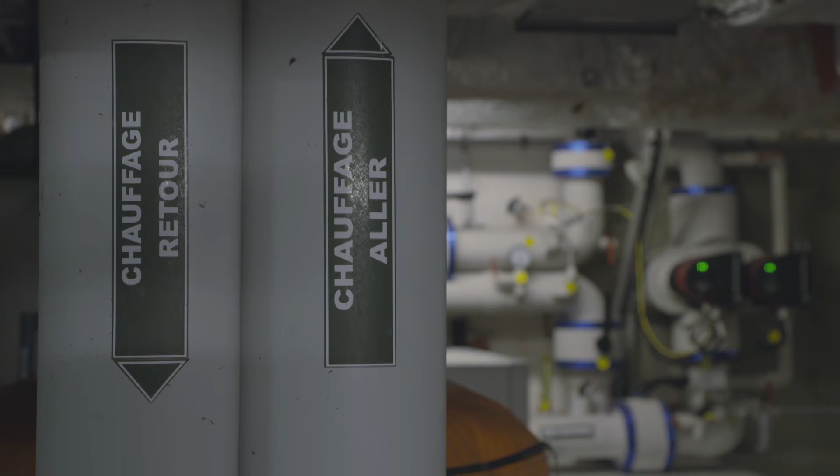Today, this ingenious system is notably used to heat public buildings, as well as a pool located in the 14th arrondissement of Paris.

The heat pump located in the pool's basement is used to heat the showers along with the pool itself at a temperature of 26 degrees. The first feedback we received was that this system is ideal for pools because they need a permanent heating system. It makes this particular one very interesting.

The city's strategy is to develop this energy source by extending its use to more and more sites. By retrieving the heat emitted by the sewers, this pool lowered its electricity bill by 70%. In the years to come, several schools and public buildings will be equipped with the same system. The Paris sewers are therefore about to become a significant renewable source of energy.

Thanks to the architectural feat and the visionary ideas of Eugène Belgrand, the Paris sewer network was able to endure through centuries. Looking back, we have to admit that they were incredibly visionary builders who created a system that remains in use today.

And what happened? Other cities have had to renew their equipment much more often, while the Paris system has been working since the 19th century without needing any significant changes. Seeing that these infrastructures are more than a century old allows me to say that the sewer system is part of Paris's heritage. As time went by, the Paris sewers were upgraded in order to keep fulfilling their mission.

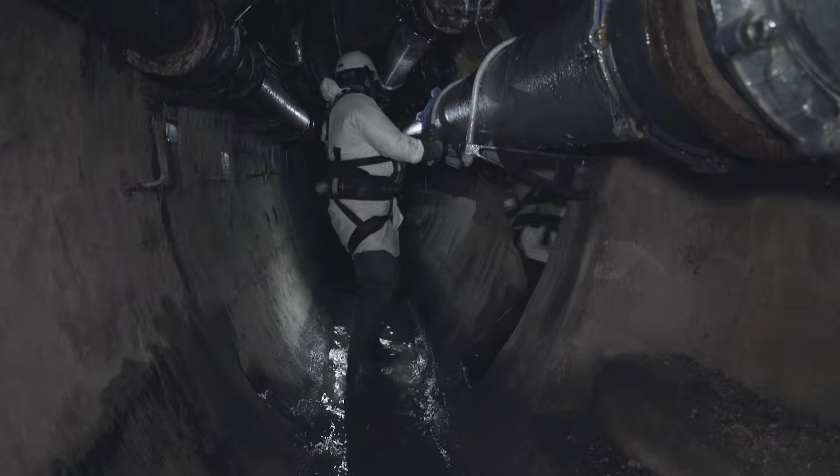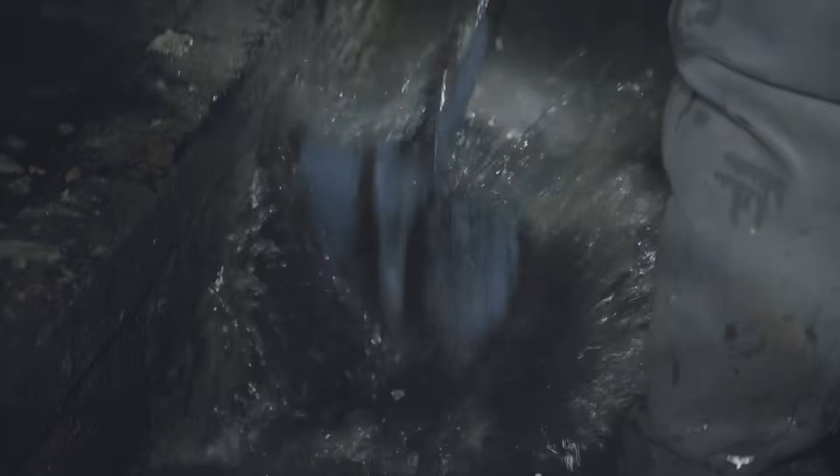But this huge infrastructure wouldn't work without the hundreds of men and women who contribute to its daily maintenance. This infrastructure, the equipment, but also the sewer workers, contribute to the development and the thriving of the city. They're invisible, key protagonists playing a part in the quality of our daily life.

We're the guardian angels of Parisians and hygiene. Our job is essential. One should be proud of being a sewer worker. Every day, all the wastewater is discreetly transported and treated through the sewer system. This technical and human feat allows the City of Light to keep shining on the surface.